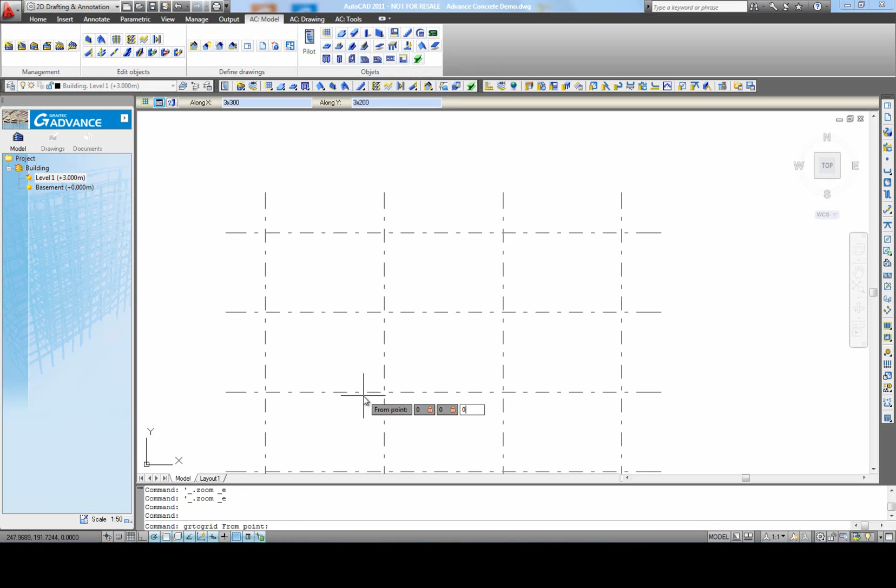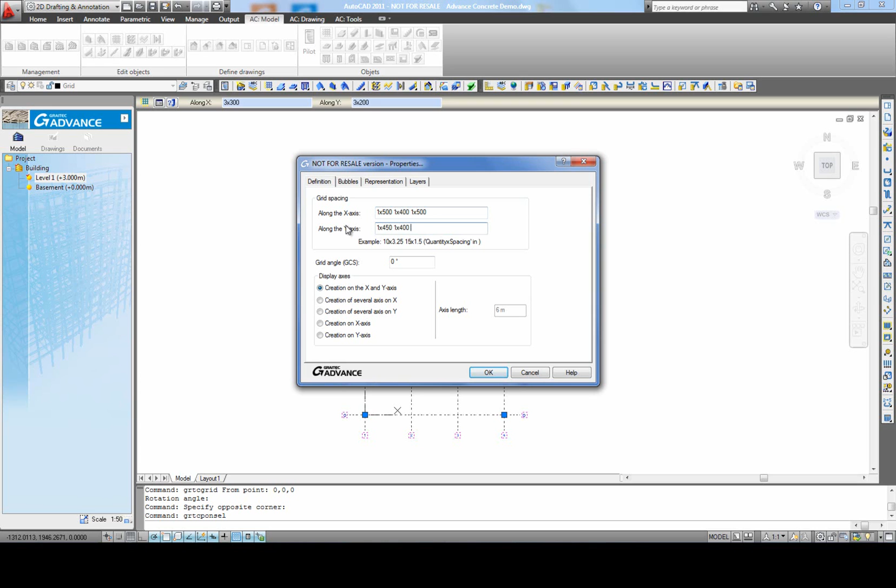We begin the modeling of a structure with 2 levels and a ground floor by placing the grid. This structure does not raise major modeling problems, but we have chosen this type of building to briefly emphasize the main functionalities of AdvanceConcrete. In the grid properties, we can modify the distance between the axes in the 2 directions, or we can modify the axis representation.

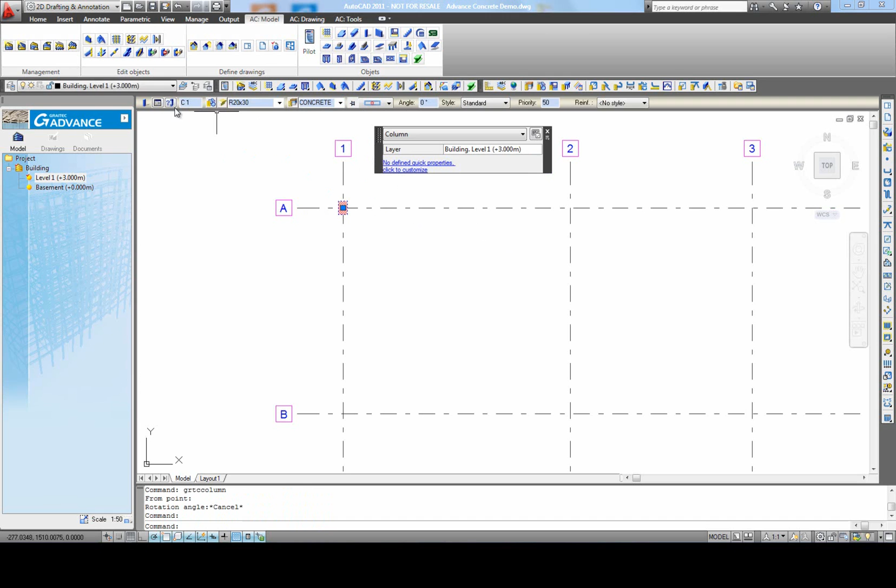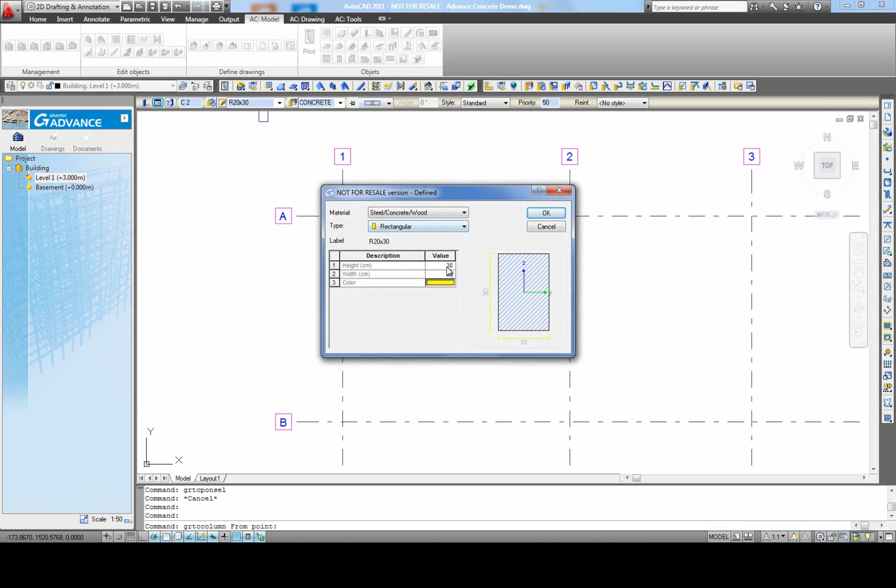We will first model the columns. We select the 20x30 rectangular section and the material. Then, we define the first row of columns. Using the AutoCAD commands, we can copy the columns at the intersection of the other axes.

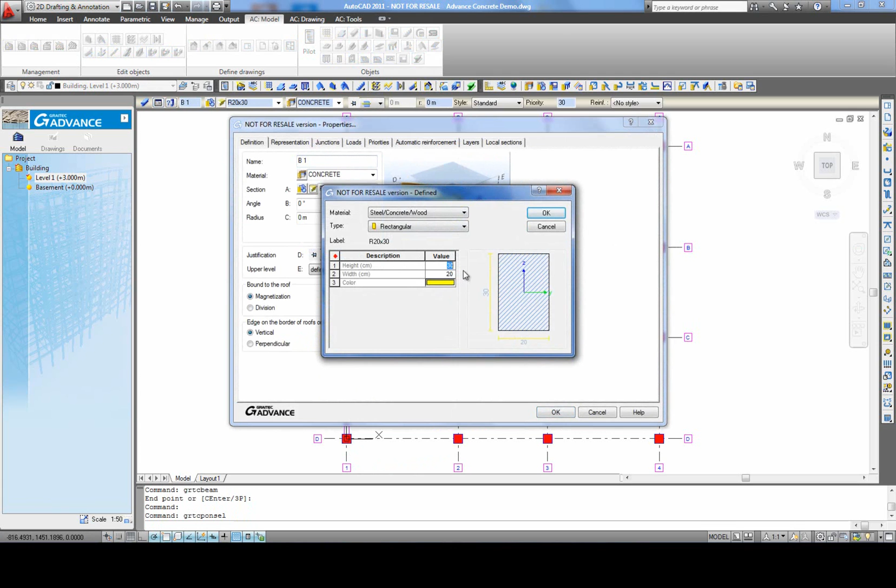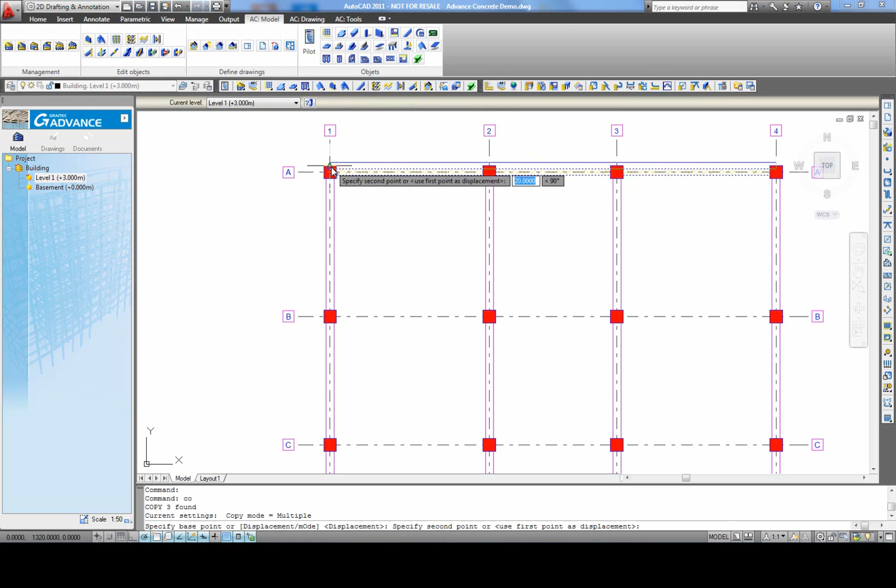We proceed similarly when modeling the beam. We define the first row of beams on the vertical direction of the sheet. And then we copy them to the other axis. On the perpendicular direction, we define the structural walls. We set a thickness of 20 cm and we define the first row of walls. In the same way, using the AutoCAD commands, we copy the walls to the horizontal axis.

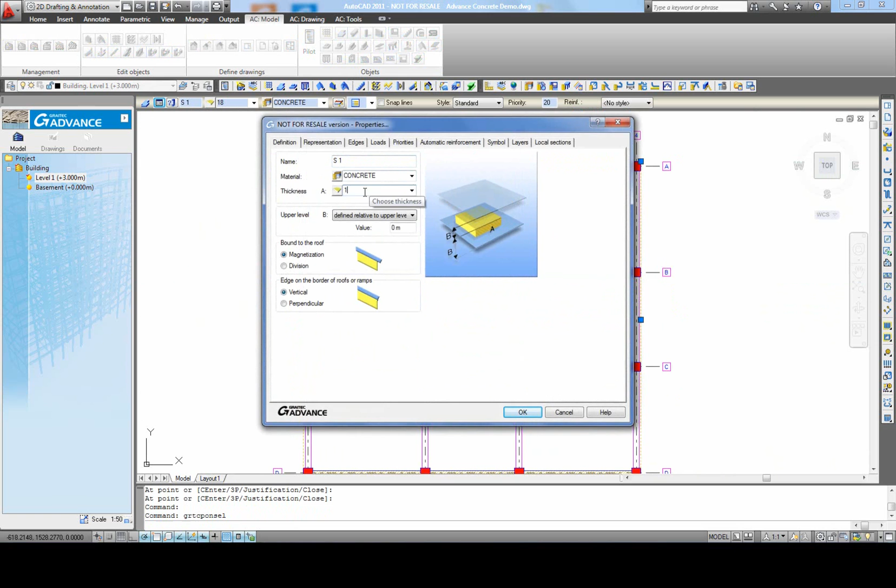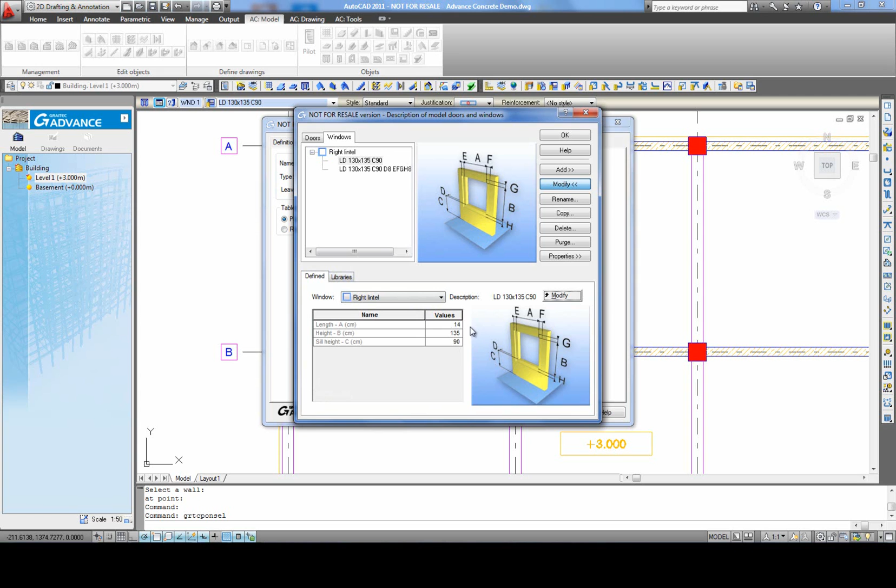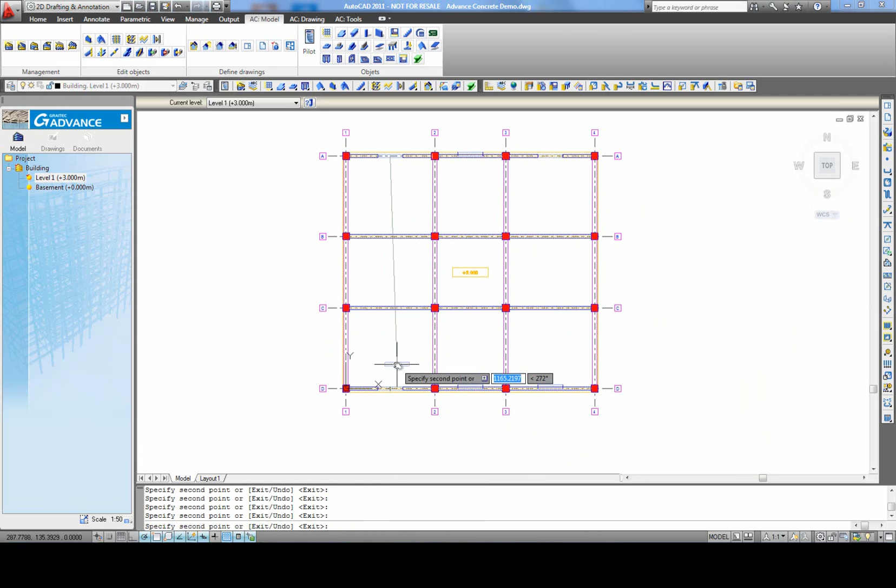We define the slab contours using points. We select a thickness of 15 cm. We position a few types of holes in the vertical walls. We can easily set parameters for the holes in the properties list. We define window holes in the exterior walls. And a few door holes in the interior walls.

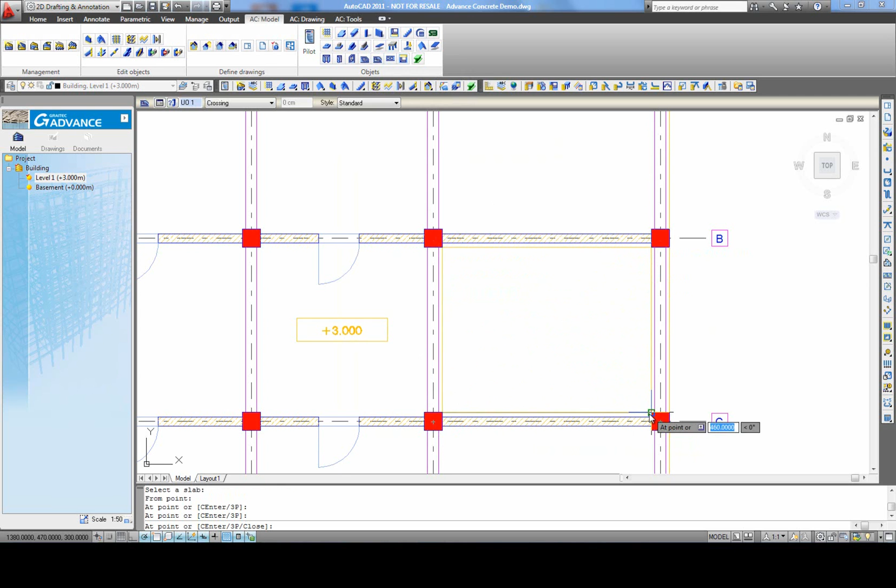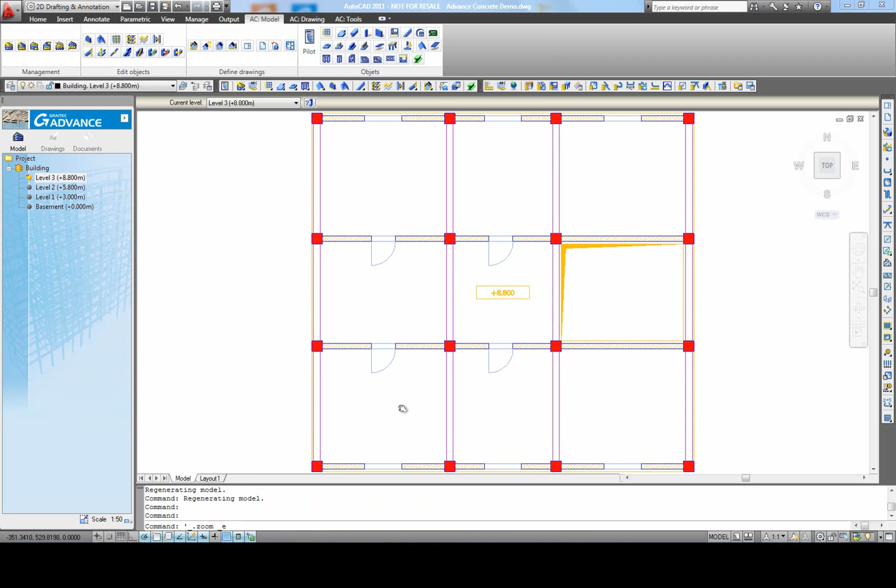All elements have been created in the first level system. Once the elements from the first level have been created, they can be multiplied on the vertical direction. From the Properties window, we can also change the height of the level. The upper dimension of the first level will be automatically modified. We create the second level by using the multiplication function.

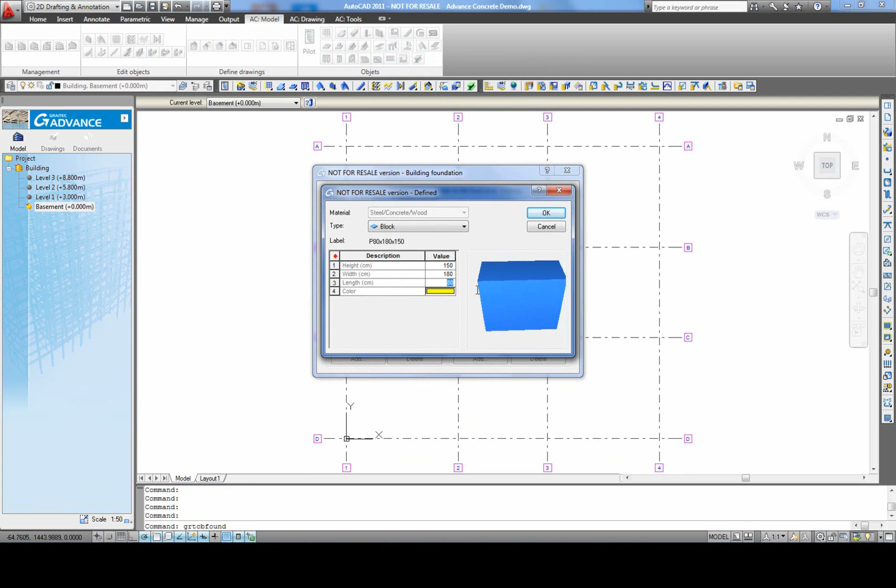The footings are generated in the basement system. The footings can be positioned by taking into consideration various criteria. We set the dimensions of the isolated footings and the dimensions of the continuous footings under the walls. We generate the footings automatically. In the next step, we create isometric views, formwork plans and reinforcement drawings.

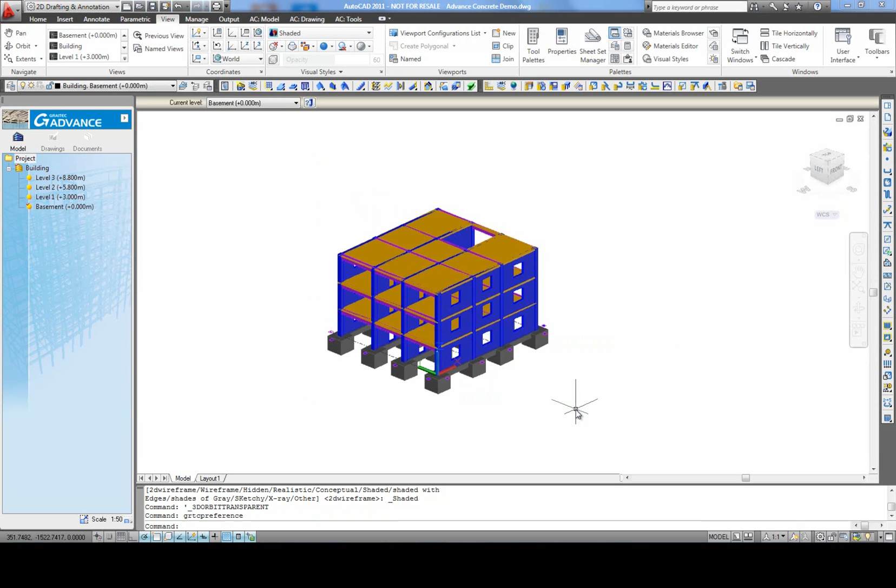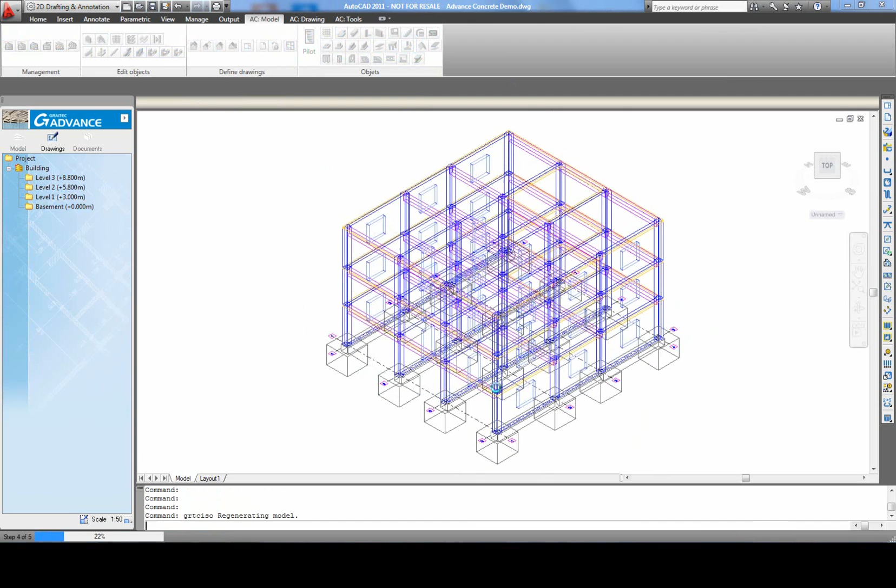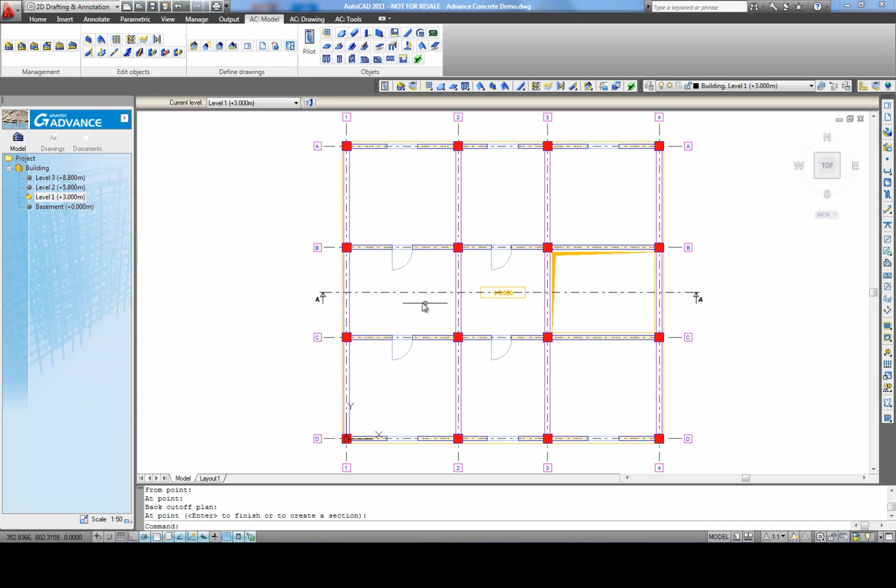We generate an isometric view. The isometric view can be separately viewed in a new drawing. Returning to the first level, we will create a few sections. We draw a section line on the plan view and we set the view depth. The section will be automatically created in a separate drawing by simply double-clicking.

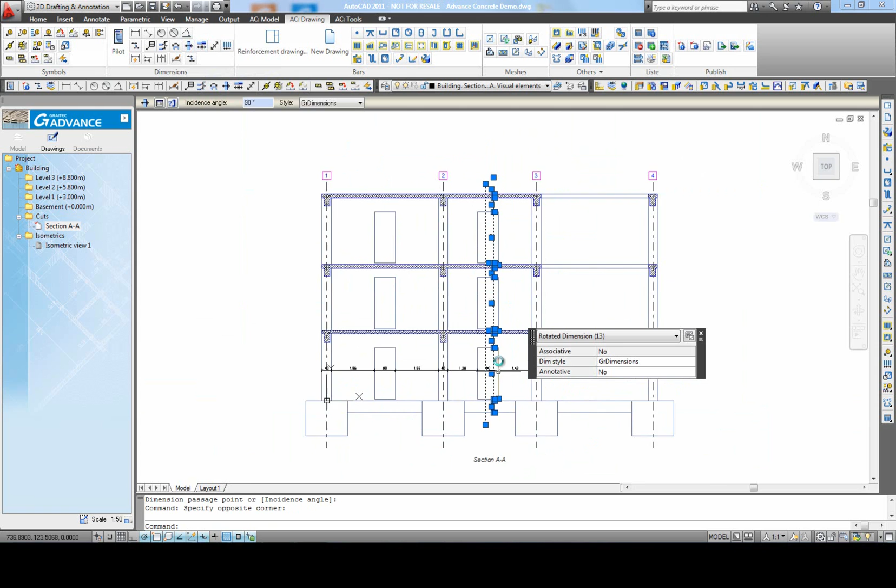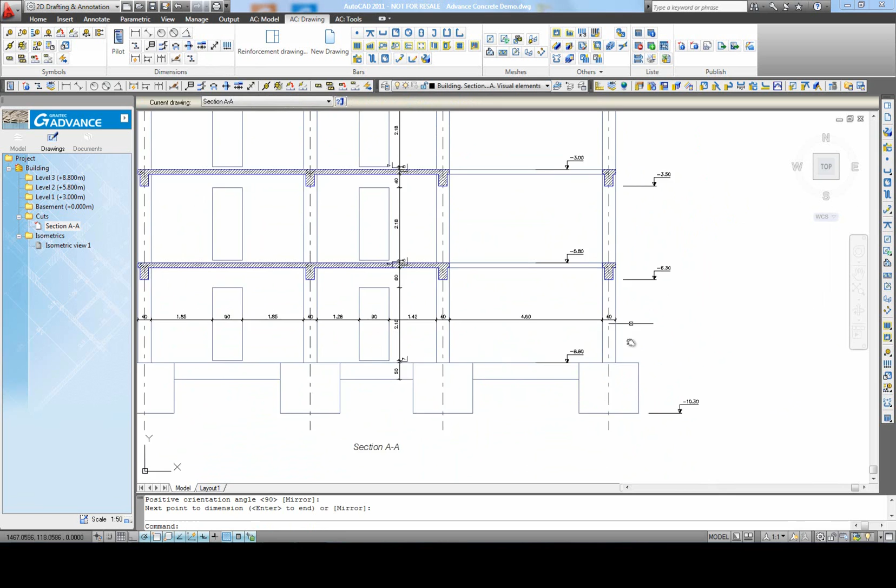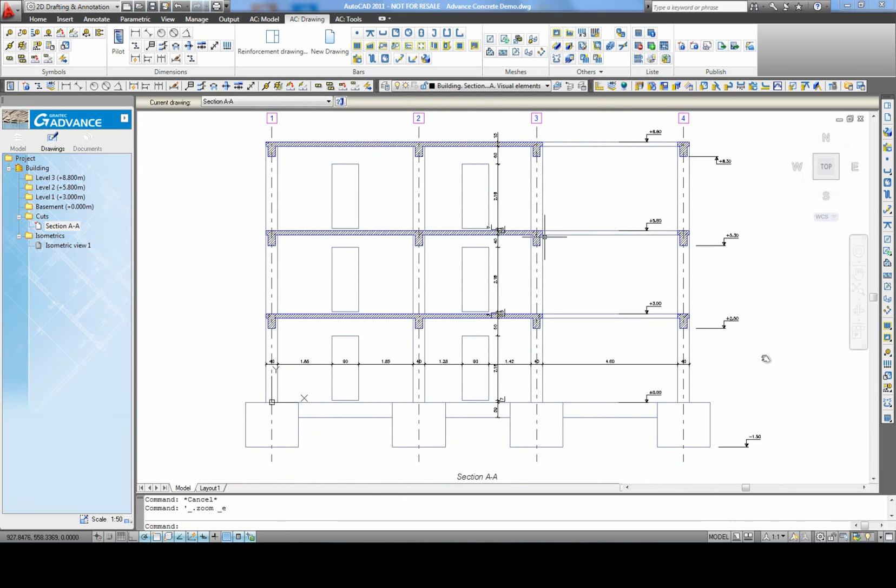We use the specific functionalities for dimensioning offered by Advance Concrete. We use the intersection dimension that automatically creates a dimensions row between all elements cut by the dimension line. The intersection dimension can be used horizontally and vertically. We continue by positioning the level dimension, starting from the level of the upper slab. The dimensions will be referred to the current section, A-A. In other cases, we can also represent sections by using polygonal lines.

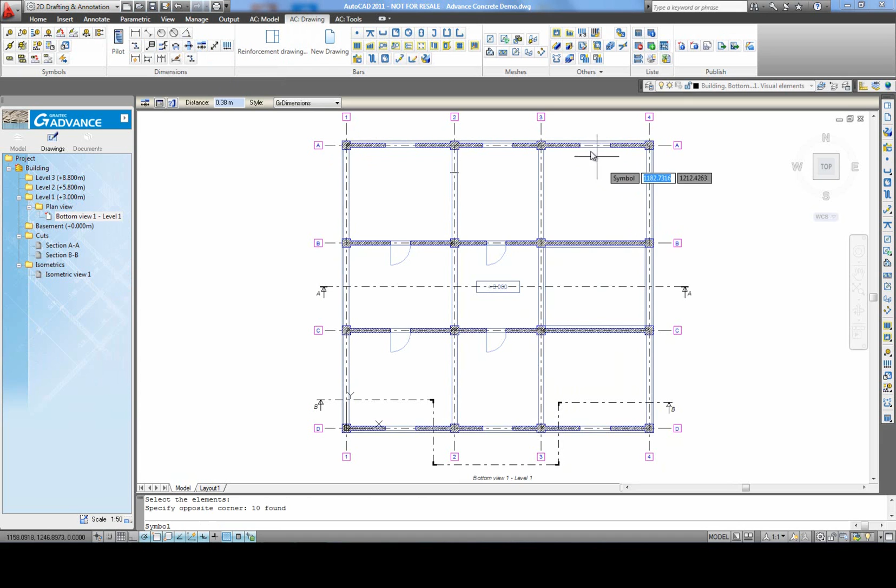Next, we create the formwork plan from the elements of a level. We select first for the elements the viewing mode from top to bottom. In a separate drawing, the formwork plan is automatically created. In Advance Concrete, an intelligent dimensioning tool is the associative dimension. By selecting all elements on a structure axis, the rows with necessary dimensions are automatically created.

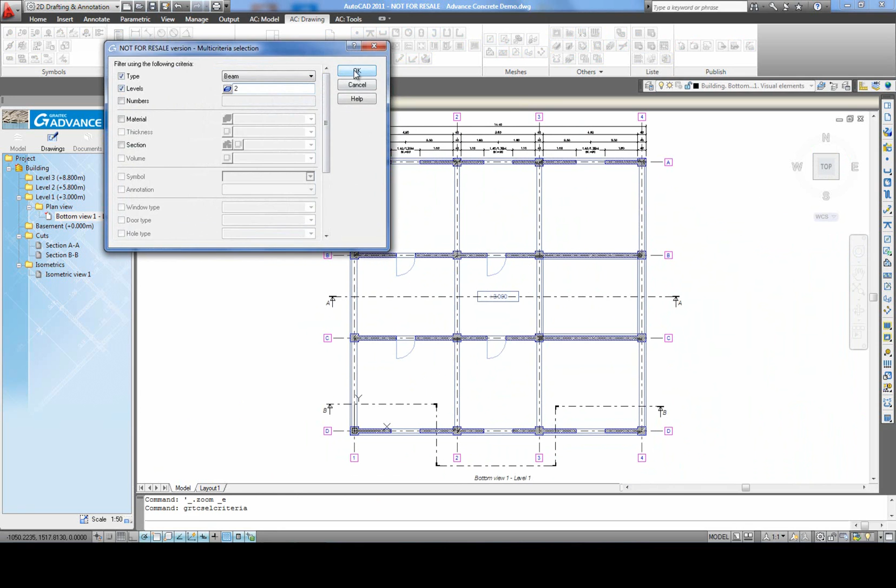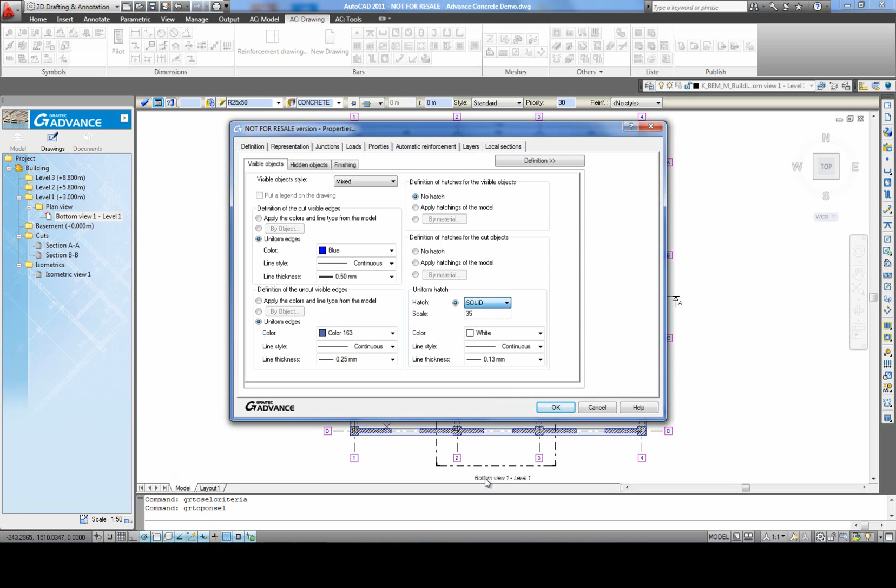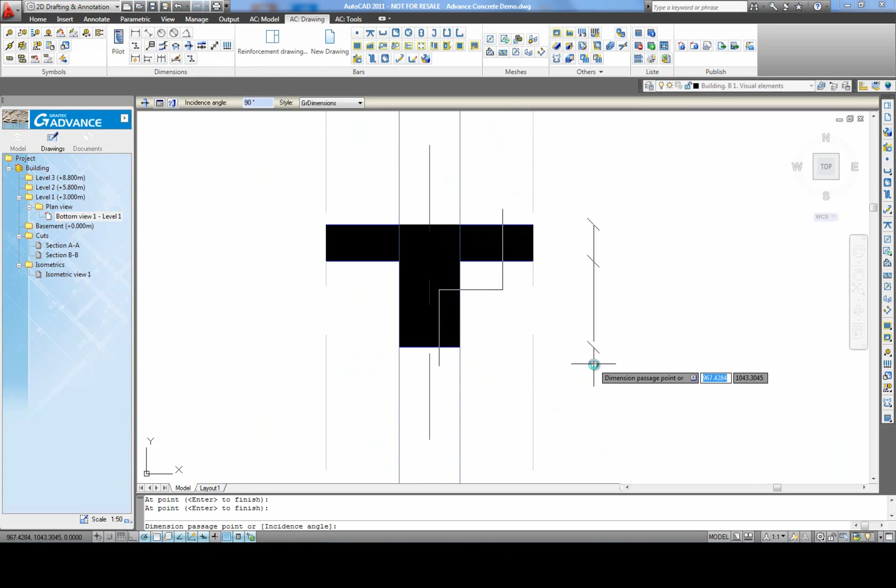On this formwork plan, we select all elements of beam type. From the properties list, we select the option for the automatic creation of sections. The sections are placed directly on the elements. They are automatically created on the already existing drawing. We can use the same dimensioning tools, the same associative dimension, but also the level dimension.

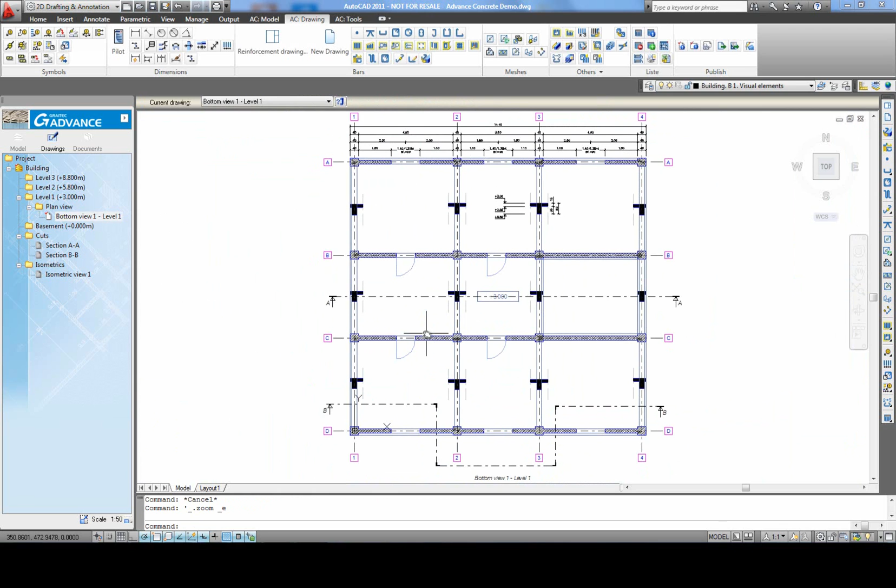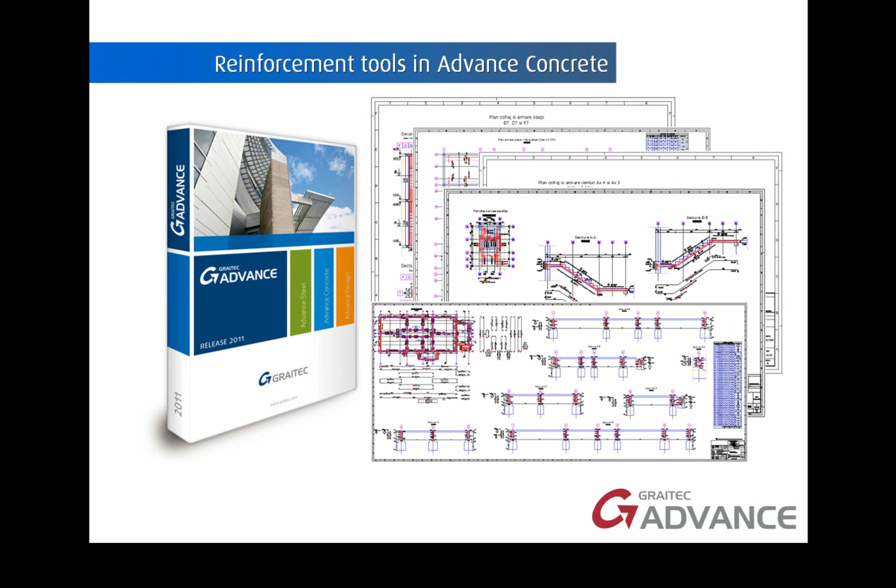The creation of the reinforcement drawings represents an important part in the process of creating a structure. Generally, the reinforcement drawings creation demands a lot of time, attention, patience and responsibility, and the issued drawings must conform to specific standards. In this context, Advance Concrete offers a set of reinforcement tools that can be easily adapted to the necessities of each project.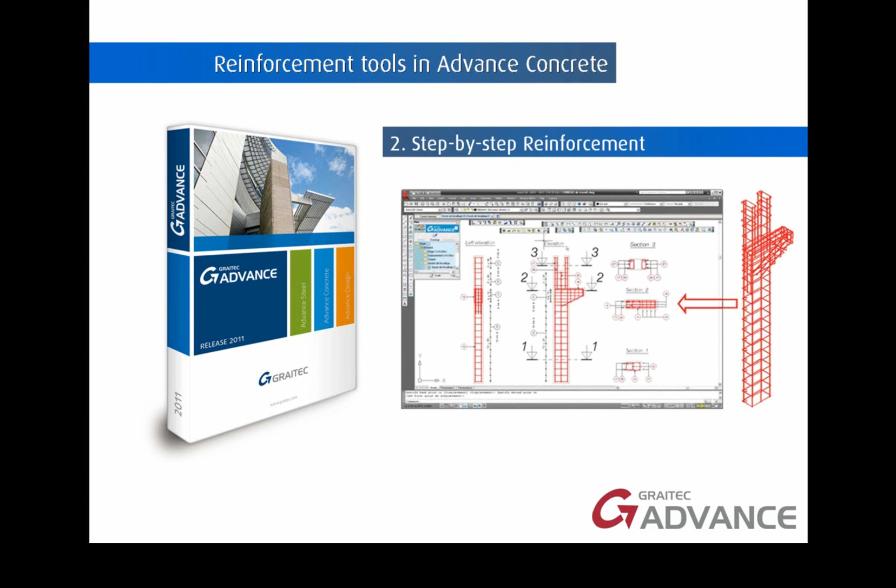1. The parametric reinforcement allows creating reinforcement details for standard structural elements in a simple and intuitive way. 2. The manual reinforcement allows adapting and obtaining reinforcement details for any type of structural element. And 3. The dynamic reinforcement represents a new concept in the modeling and detailing of reinforced concrete structures that significantly accelerates the reinforcement drawing creation by automatically placing reinforcement with drawing update after each modification made to the model.

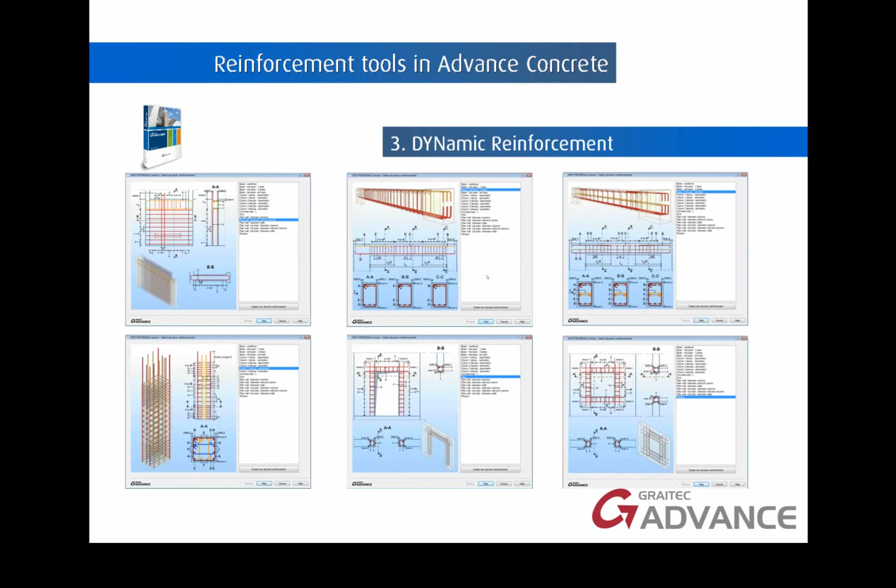The dynamic reinforcement solutions allow the fast reinforcement of standard elements, beams, columns, footings, slabs, taking into consideration their context, such as the element's intersection, and also the reinforcement of prefabricated elements.

Using Advance Concrete dynamic reinforcement, the elements from a detail can be saved and then applied to other groups of similar elements of different dimensions after modifying the key parameters.

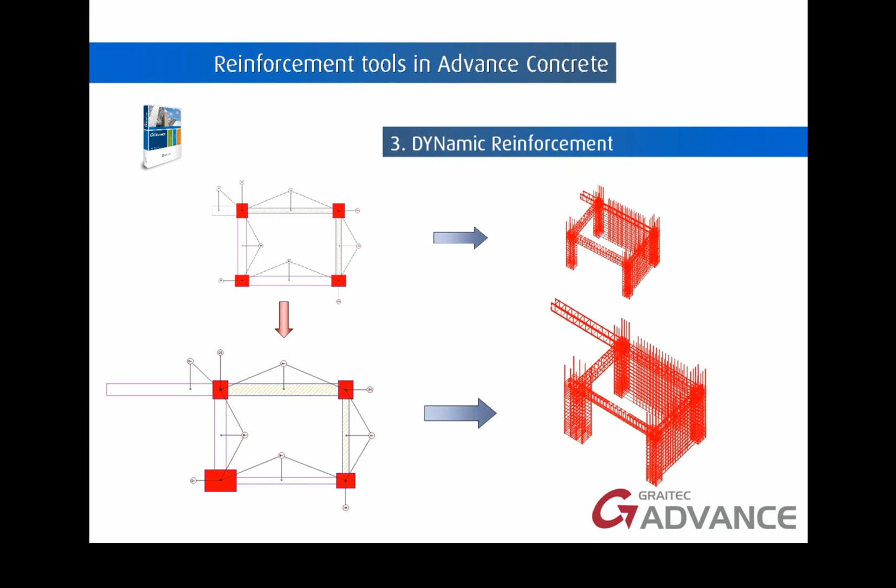After creating the formwork plans, we will exemplify the main ways of reinforcing concrete elements. In this case, we will use the parametric reinforcement for a column. From the properties list, we select the section shape.

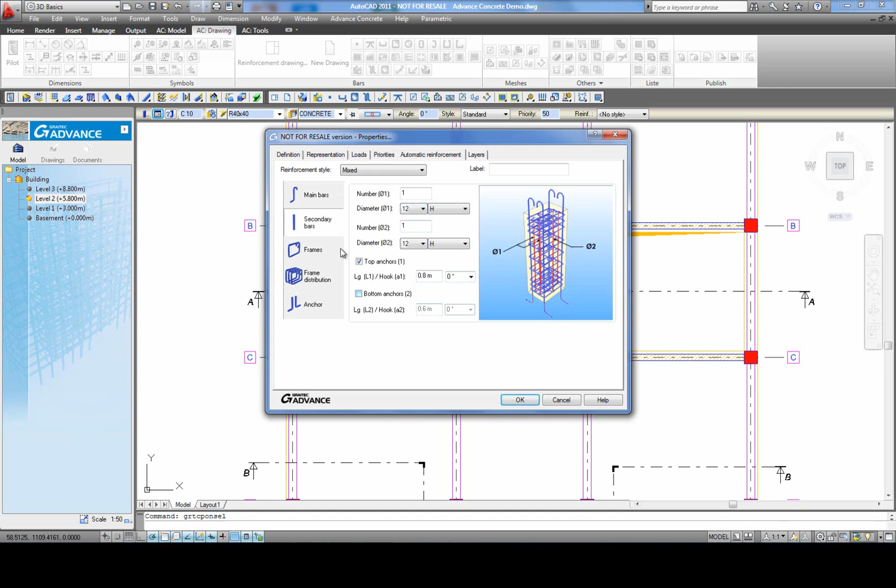Then, we use the reinforcement details for the main bars, the secondary bars, stirrup bars and their distribution.

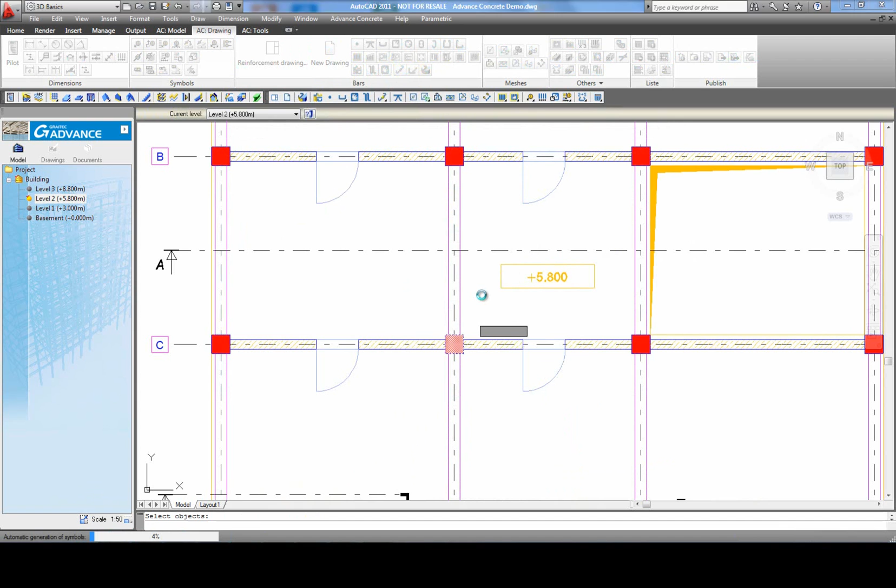By selecting a column, we generate a reinforcement drawing. In the new drawing, we will view the reinforcement of the element. The bars were automatically associated with reference marks.

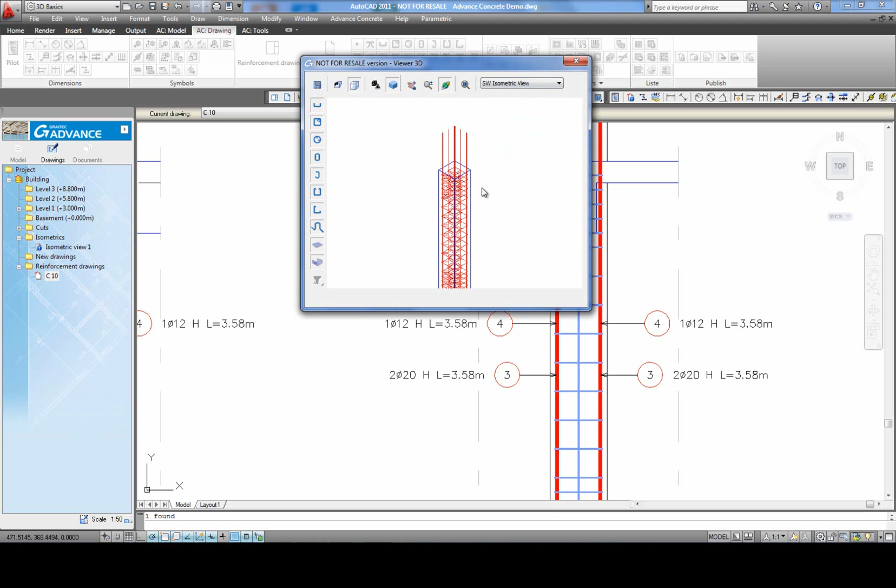We can also view the reinforcement cage in the 3D viewer mode. The cage can be saved, and then insert it in the drawing that contains the column reinforcement.

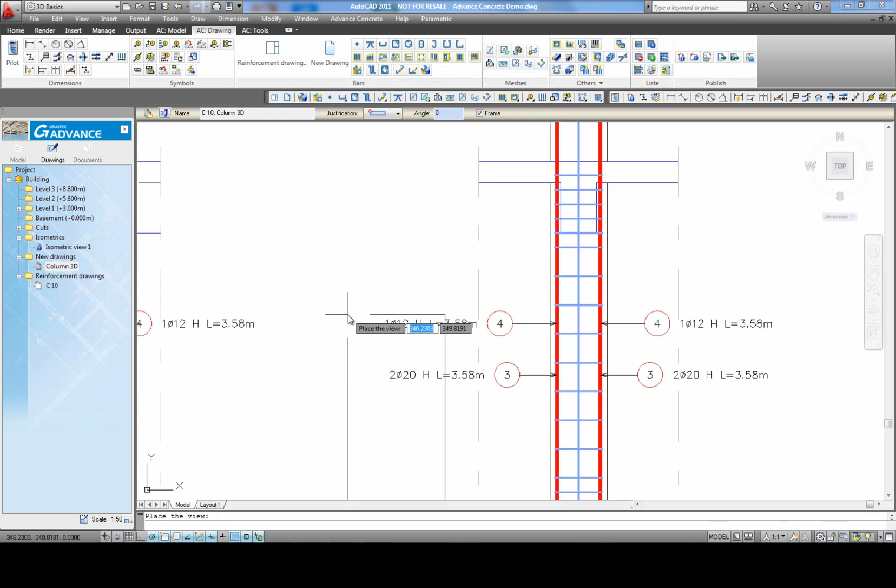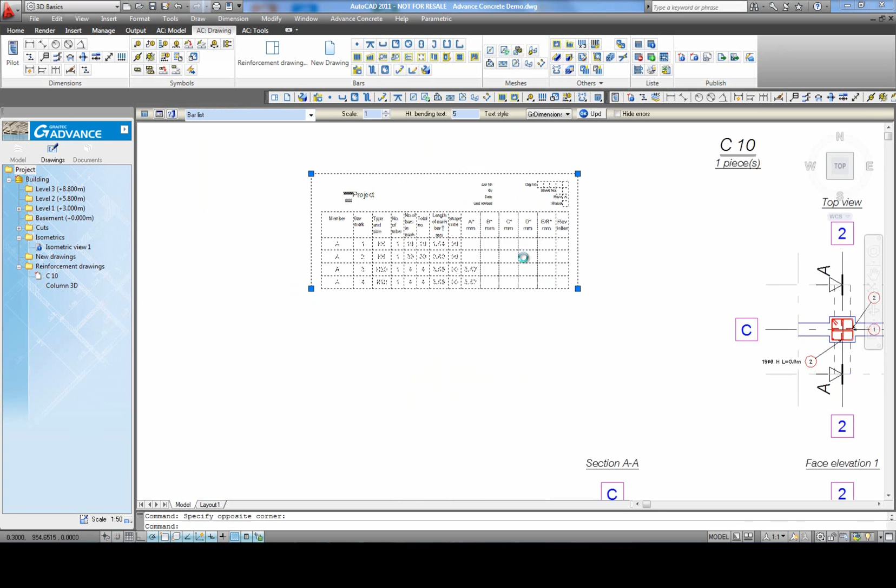On these drawings, we create a bar list. The list contains all necessary information, including the bar details.

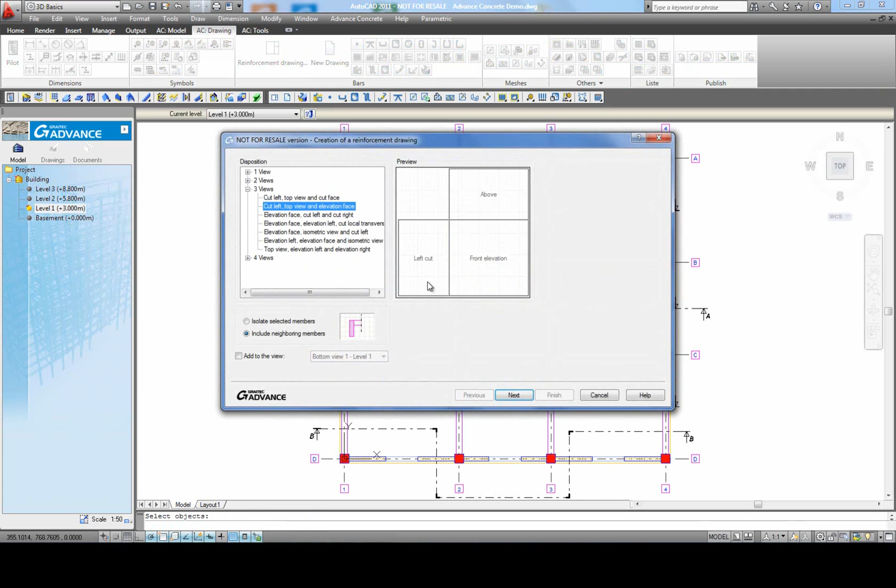Next, we will shortly exemplify the manual reinforcement of a beam. First, we select the beam, and then we generate a formwork plan that can be viewed in a separate drawing. Like in the previous drawing, the formwork plan is represented on the elevation, on the top view, and on the section.

On the elevation view, we define the longitudinal bars by taking into consideration the formwork edges. We position first the bar on the upper side of the beam.

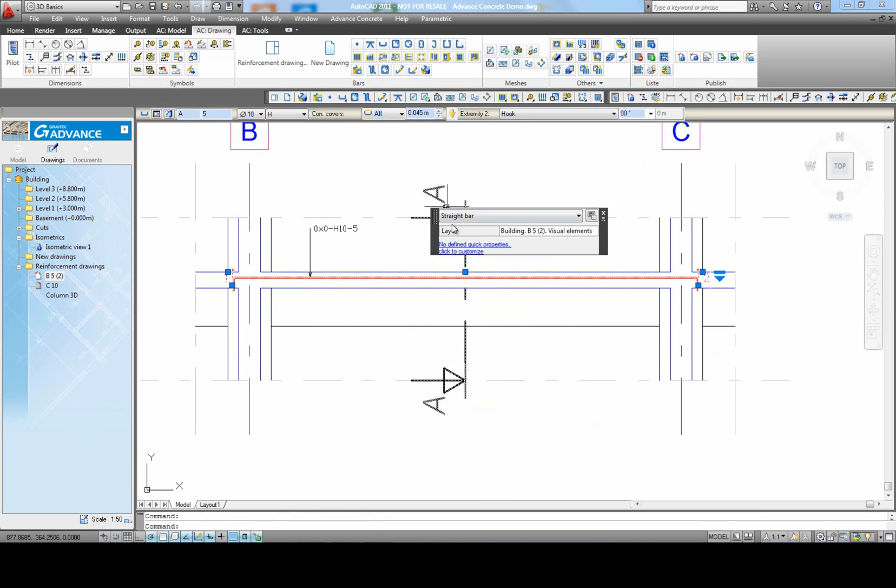From the bar properties list, we can modify the anchor length, or we can add hooks. We proceed similarly when defining the bar on the lower side of the beam.

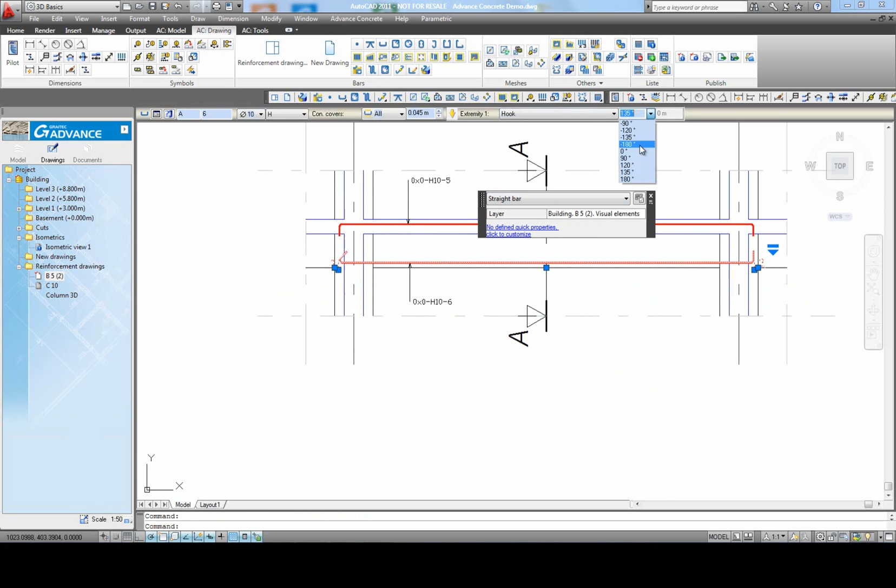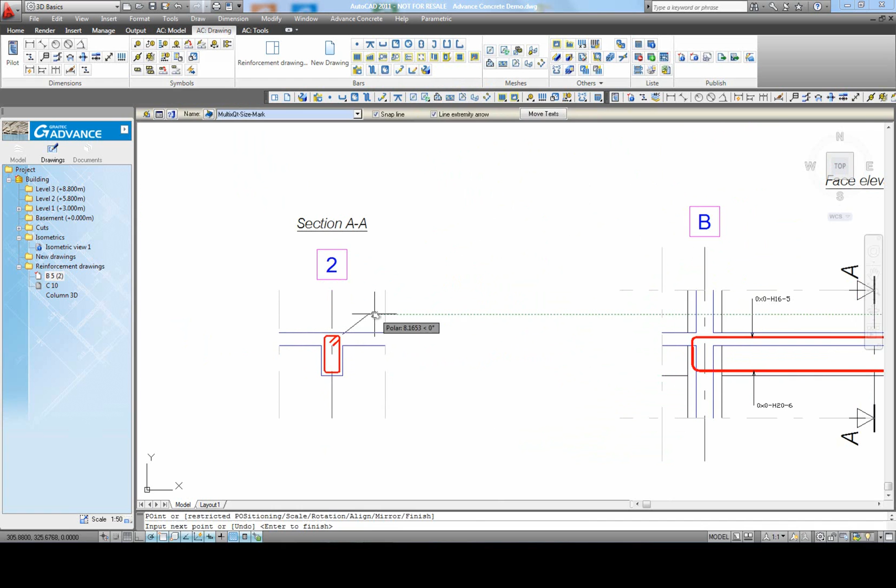In the beam section, we draw a rectangular frame using the section edges as reference points. We select for the rectangular frame a diameter of 10 mm.

Each reinforcement bar that was defined is automatically associated with a reference mark. To number them, we must distribute the definition bar.

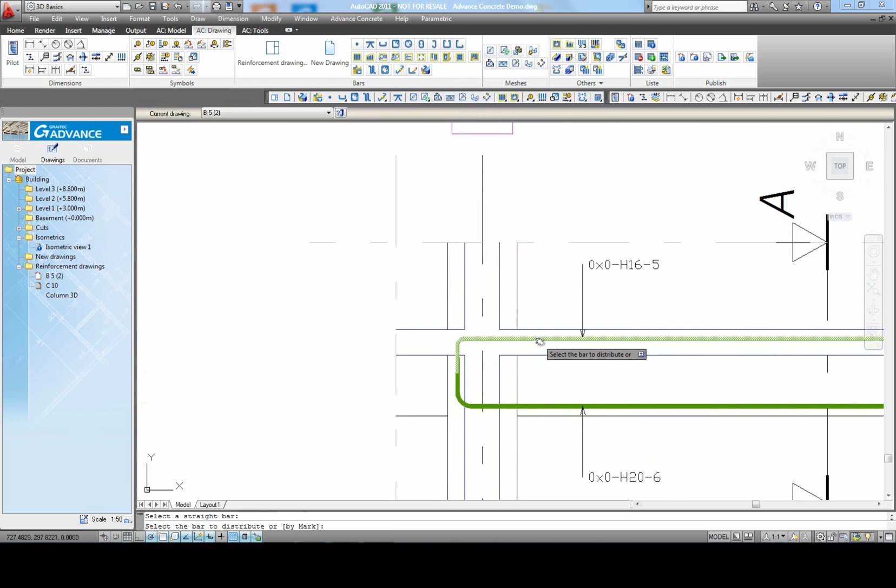We start first with a point distribution of the longitudinal bars on the beam section. Once the bar was distributed with the 3D power function, the bar is automatically generated in the other views.

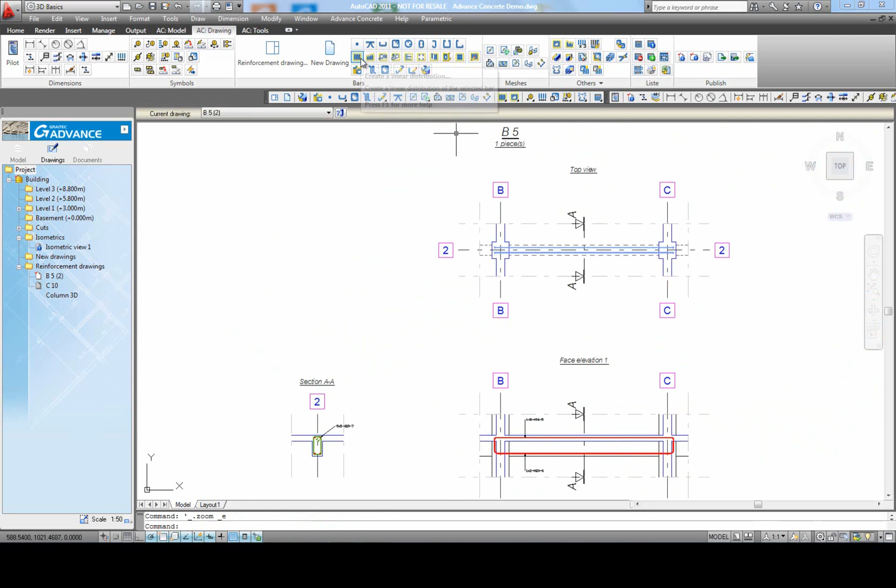We continue with the rectangular frame distribution on the elevation. The distance between the rectangular frames can be set by taking into consideration different types of distribution.

We select the quantitative distribution, through which the number of necessary rectangular frames on the central area of the beam is automatically determined.

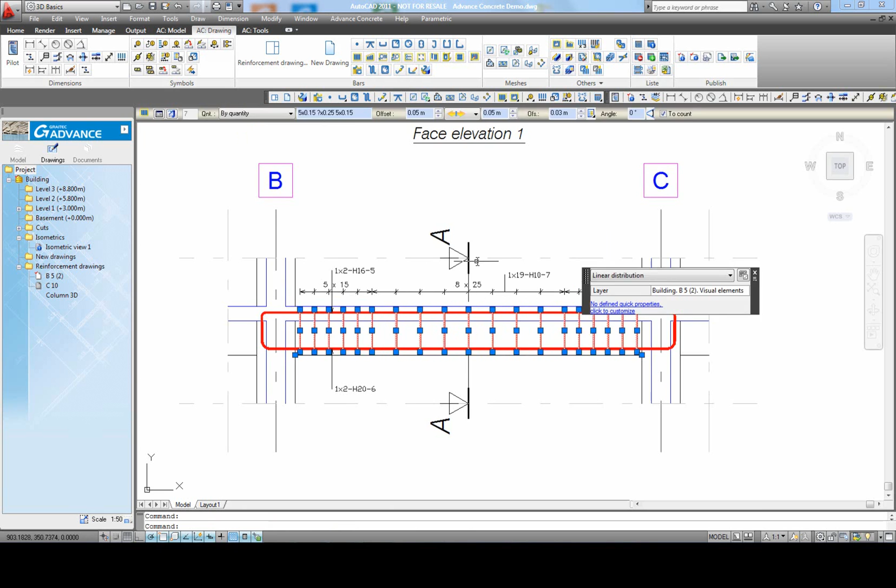We automatically generate bar details for all bars.

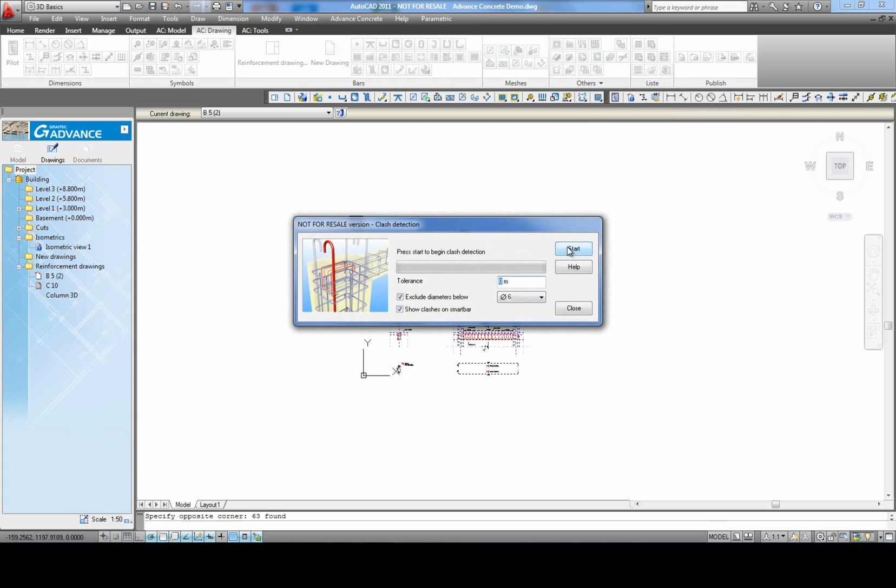Finally, we generate a collision check for the reinforcement bars. The collisions can be rapidly identified using the 3D view function. Through the collision check, we discover that there is a collision between the hooks of the longitudinal reinforcement.

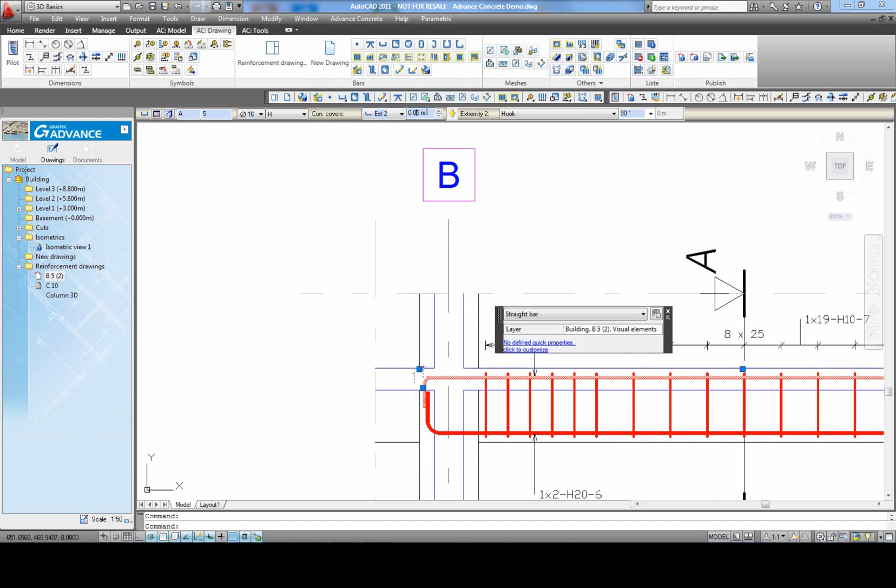The bar details are instantly updated after making these modifications. When repeating the collision check, we notice that there is no more error.

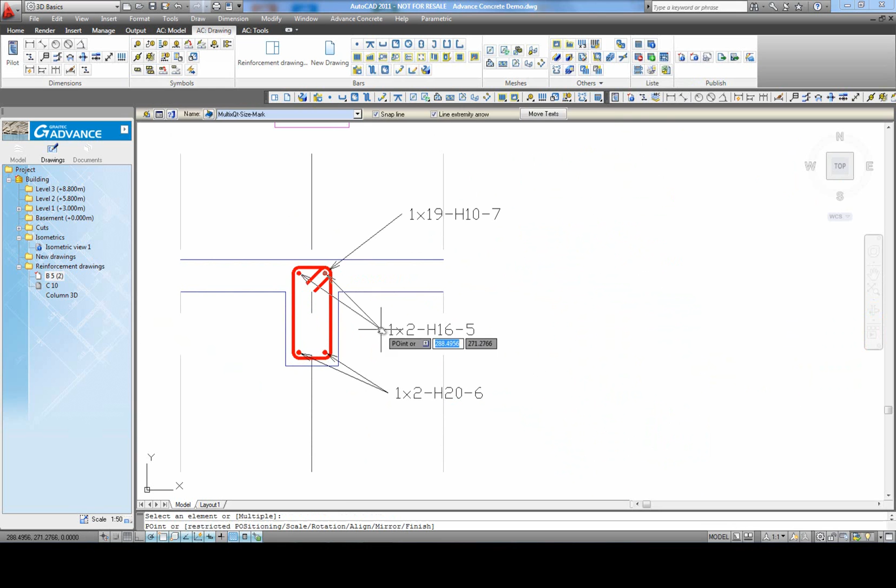Next, we can add a 3D representation of the reinforcement framework to the drawing.

We add a bar list with bar details.

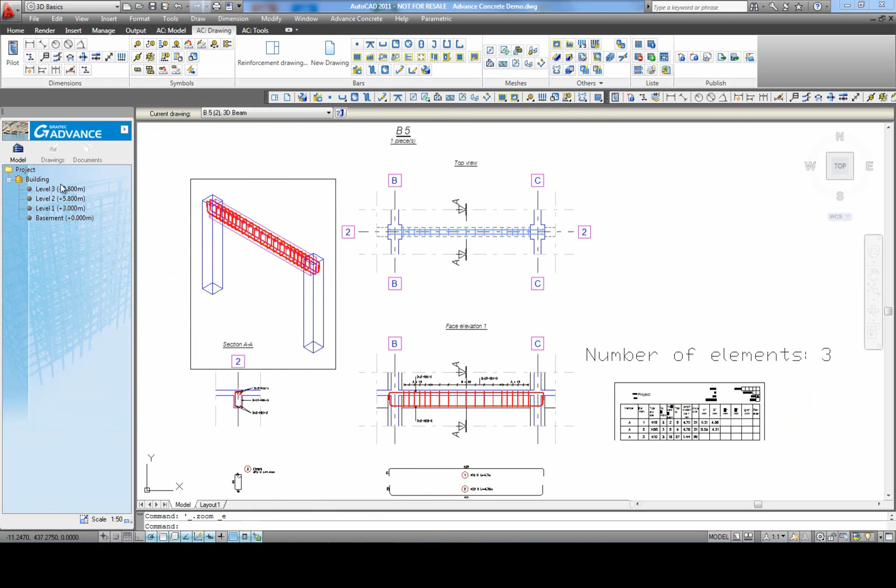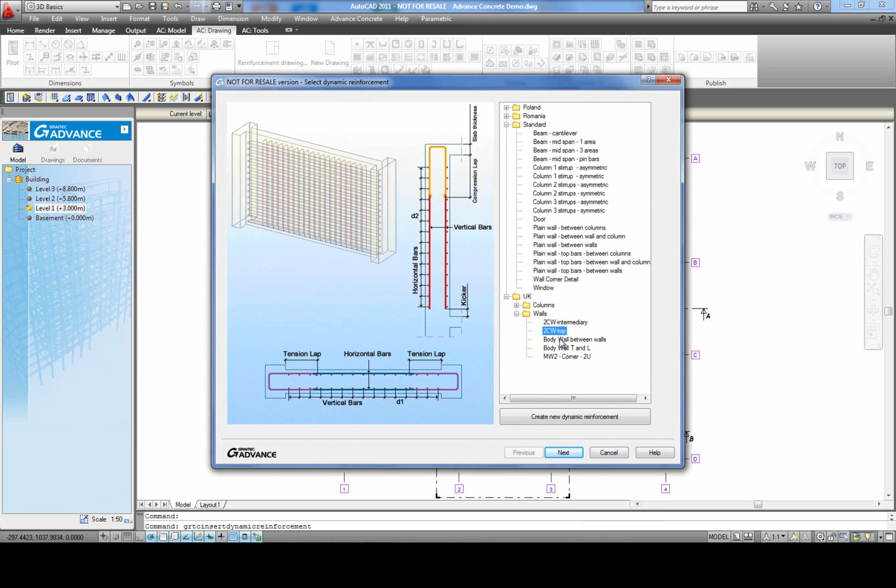Next, we reinforce a wall supported by two columns using the dynamic reinforcement concept. From the Reinforcement Solutions library, we select a solution appropriate for this case. In the Properties list, we modify the parameters that will be reflected in the details of the reinforcement drawing.

We select the specific elements for applying the solution, the wall, and the two columns.

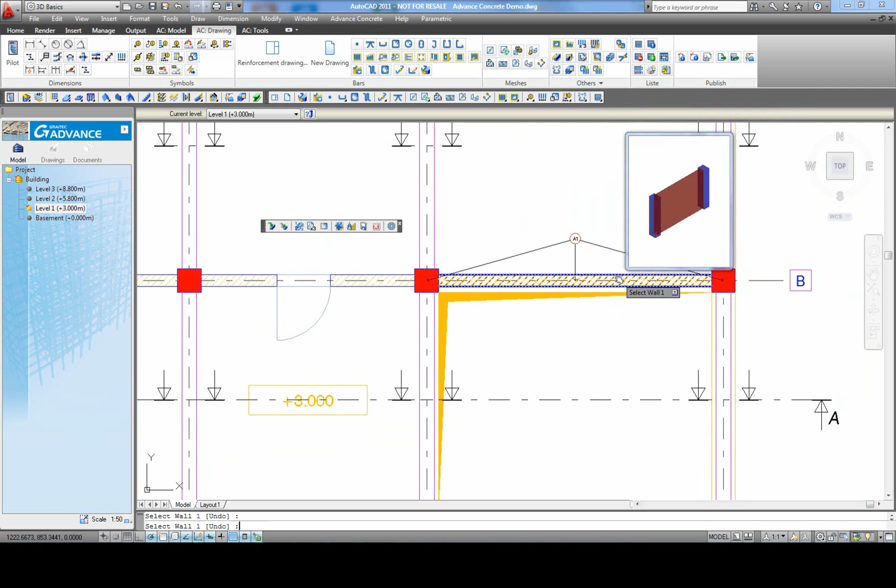In the same manner, we apply individually for the columns the corresponding reinforcement solution according to the dynamic reinforcement type that we wish to apply to these elements.

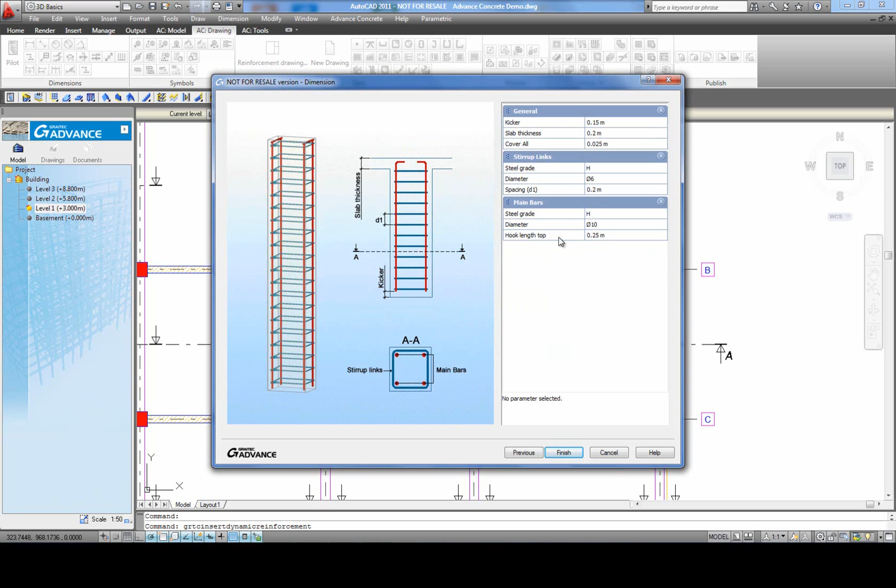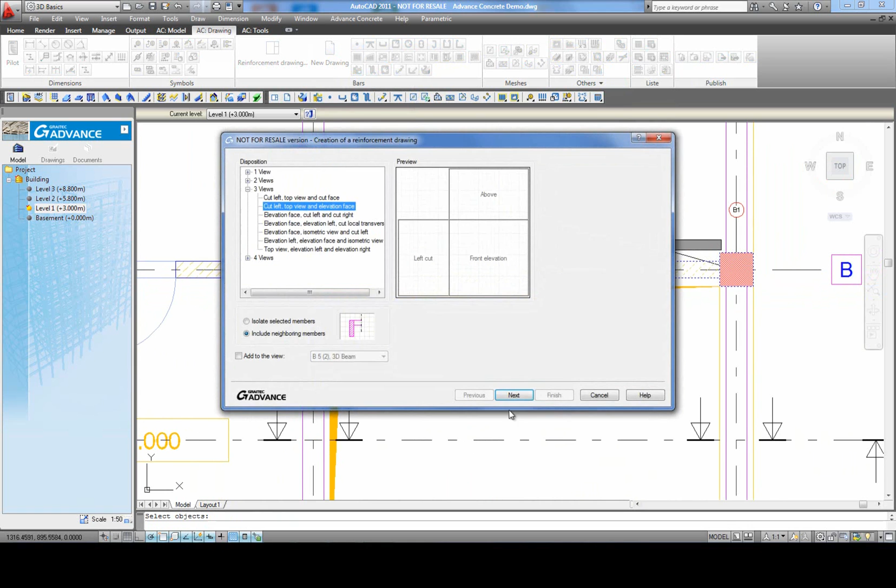We select the three elements and we create a new reinforcement drawing. In a new drawing, we can view the reinforcement of the elements on the elevation, on the section, and also on the top view.

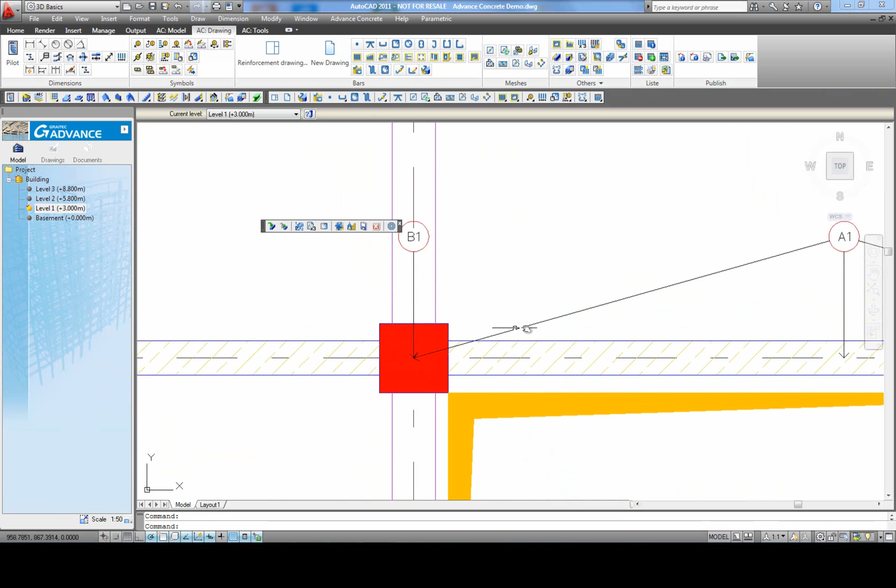The great advantage of this type of reinforcement is that by modifying the element's dimensions, the reinforcement drawing is automatically updated.

For example, we can modify the dimensions of a column. After updating the reinforcement drawings, the reinforcement formwork will be automatically updated to the new dimensions of the formwork.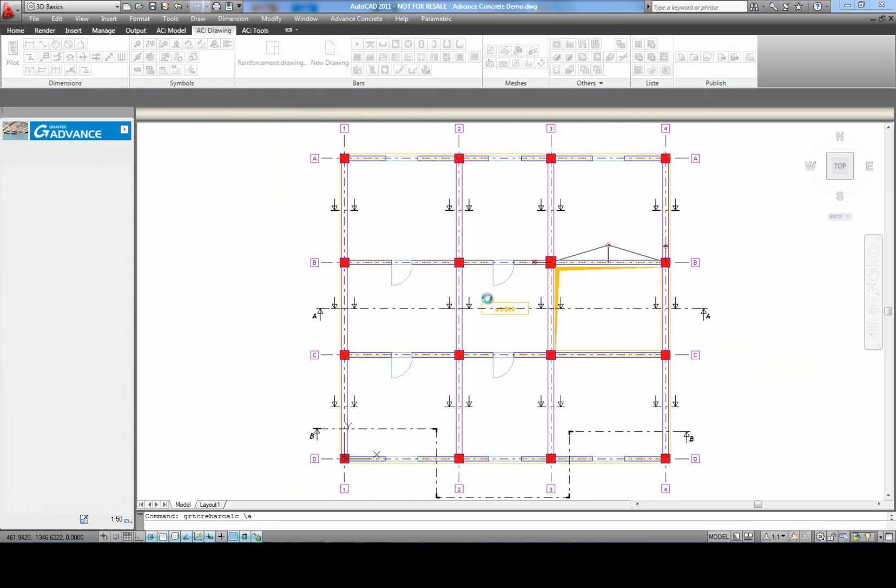We generate a bar list.

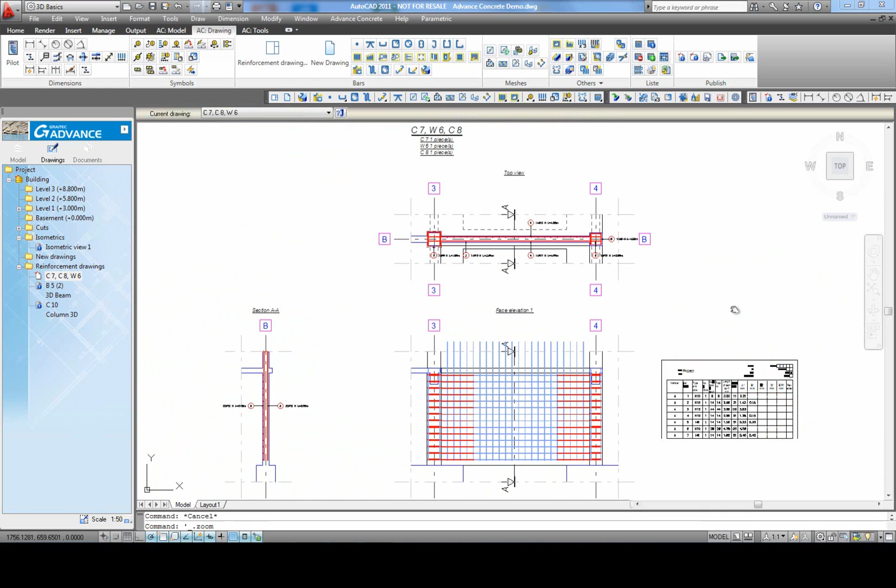We also insert in this drawing a 3D representation of the reinforcement, and then,

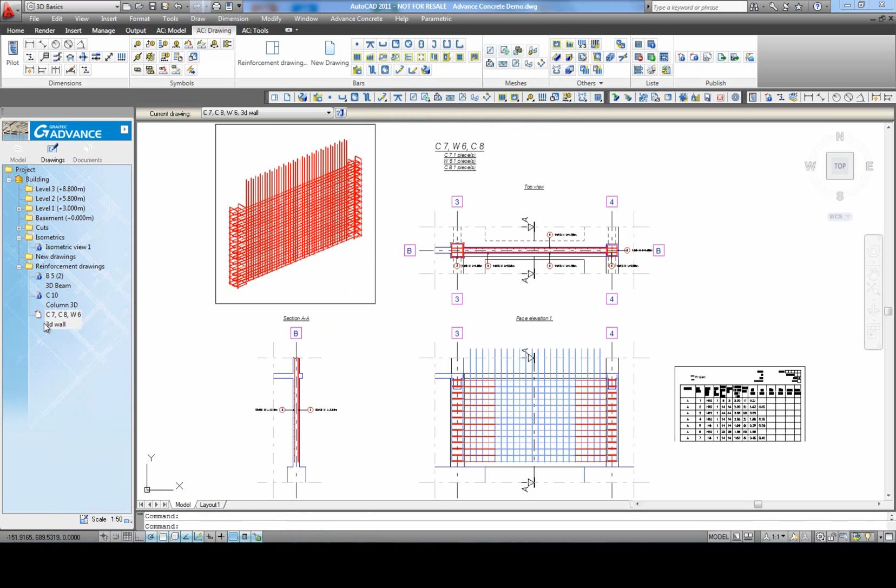To create the final reinforcement drawings, we must only select a standard layout. We set the dimensions of the layout frame and the content of the title block.

Then we insert the drawing in this layout.

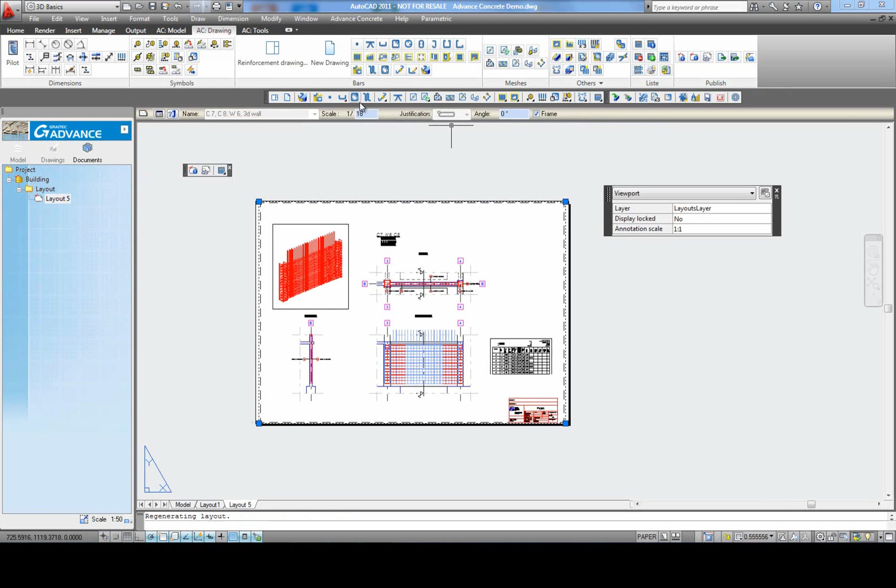In this presentation, we only offered a short overview of the main functionalities of the modeling and detailing solution for reinforced concrete structures, Advance Concrete. For more information, please do not hesitate to contact a GRAITEC representative.